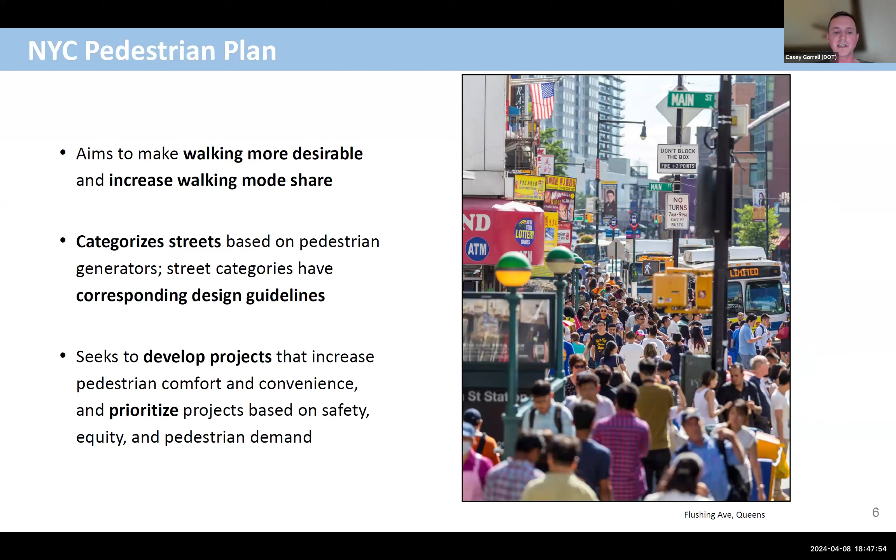One thing we want the plan to do is categorize streets based off of pedestrian generators and create corresponding design guidelines based off of those street categories. We also look to develop projects that increase pedestrian comfort and convenience coming out of the pedestrian mobility plan, and prioritize projects based off of safety, equity, and pedestrian demand.

So, mode share and barriers to walking. One interesting thing about New York City is that we're a city of walkers throughout the entire city, maybe to varying degrees. The map on the right shows the percent of commuters who walk or take transit as their primary mode for travel into work, and you can see it's really concentrated in the central part of the city, in Manhattan and parts of Brooklyn and Queens.

However, you can also see that there are parts of the city in the outer boroughs that also have a very high amount of walking. That's shown on the left with the difference between outer Queens and middle Queens, where walking is still a fairly substantial mode for people on their daily trips throughout the city.

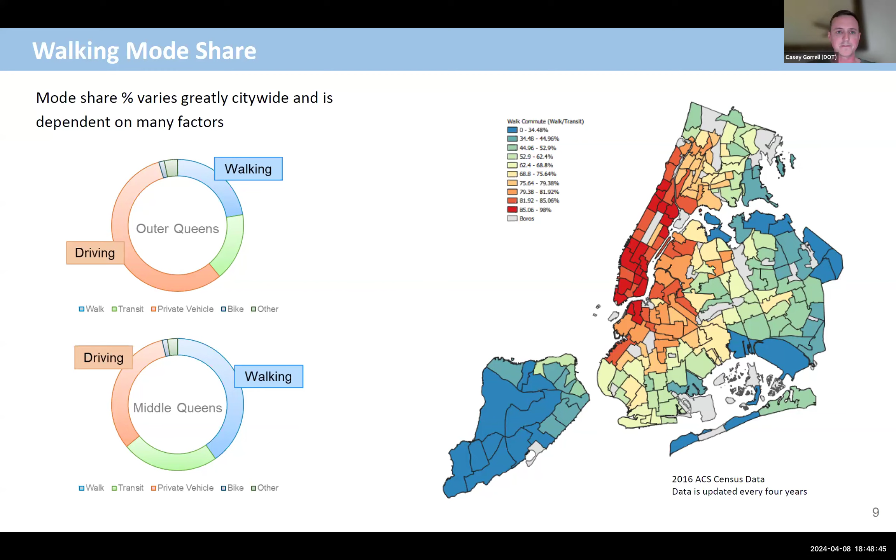However, with all this walking, there's also a lot of barriers that prevent people from walking. We've started to identify some of these issues as part of the pedestrian mobility plan. The key ones to note are missing sidewalks, or sidewalks that are there but insufficient in width. There are also sidewalks covered in barriers that prevent walking within the sidewalk that exists. And then we're also looking at a lack of crossings, especially on multi-lane streets—pedestrians need to walk on a sidewalk and then be able to cross the street to get where they're going.

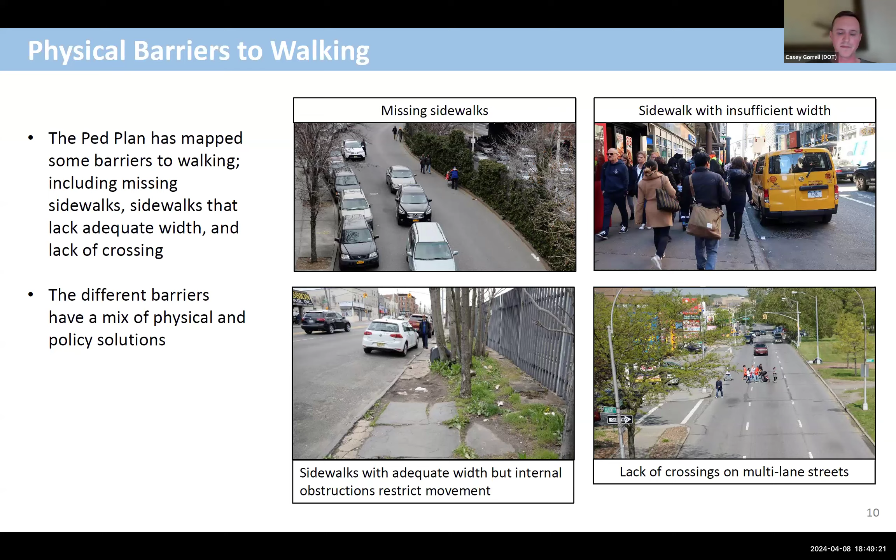As part of this mobility plan, we've created the pedestrian demand map to guide our thinking on this process. The reason for creating this is to prioritize pedestrians, who have up until now been fairly left out in design requirements and also left out of a lot of planning analysis, more specifically at a countrywide federal level.

The difficulty with pedestrians is that they don't function like a lot of other modes, where the focus is really getting from A to B. Pedestrians sometimes just go on walks without a general destination, maybe using walking as a mode of recreation, or changing modes throughout their trip depending on their needs—like someone walking to a bus stop, taking the bus, and then walking for the remainder of their trip.

One thing we've also noticed is that sidewalks really lack some of the more stringent design and level of service requirements that other modes enjoy. There's a lot of modeling guidance and requirements for vehicles, even for bikes and buses, with widths required for different types of lanes. But sidewalks really only have ADA guiding the minimum width for sidewalks to maintain accessibility, which isn't really appropriate for a city of our scale. We believe that the pedestrian demand map and the categorization based on demand can help develop targeted design guidelines for all of our sidewalks.

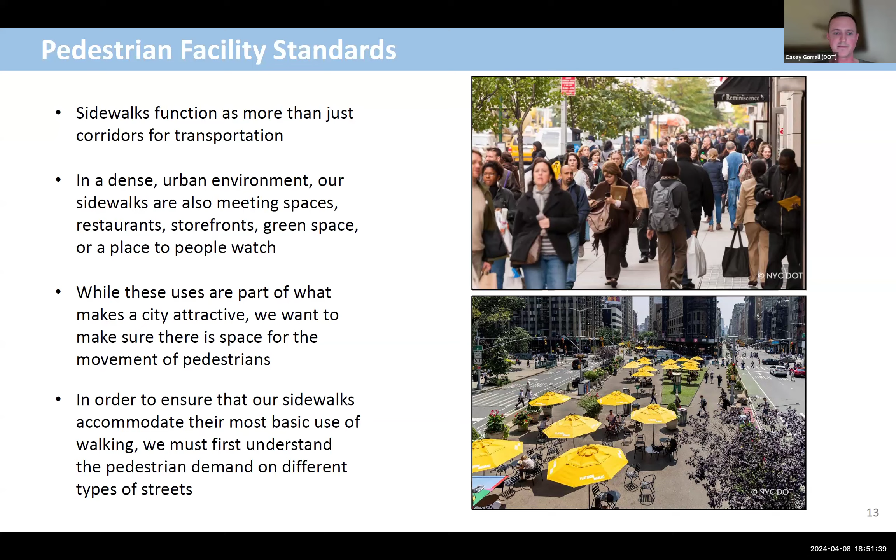So we have created the pedestrian demand map, which creates 5 categories of street. Starting on the top left, this is the baseline street. This is the most basic type of sidewalk in the city, typically reserved for residential neighborhoods, where you would really only encounter maybe 1 or 2 pedestrians walking on the sidewalk at a given time.

The next level up, we have the community connector. These are streets where we see groups of people maybe connecting to a retail corridor or walking to access a transit stop. So you usually see people in small groups walking, or someone alone with their partner.

We then move up to neighborhood corridor. These are the more standard neighborhood retail streets where you see predominantly groups of people walking to access neighborhood businesses and restaurants, and see a larger uptick of pedestrian activity.

The last 2 corridors are regional and global corridors. These are the really high tier, high pedestrian volume streets in the city, with regional being large corridors in the boroughs, and global corridors being reserved for those really busy Manhattan avenues where you see crushing crowds of pedestrians on a typical normal day. So those are the 5 categories that make up the demand map.

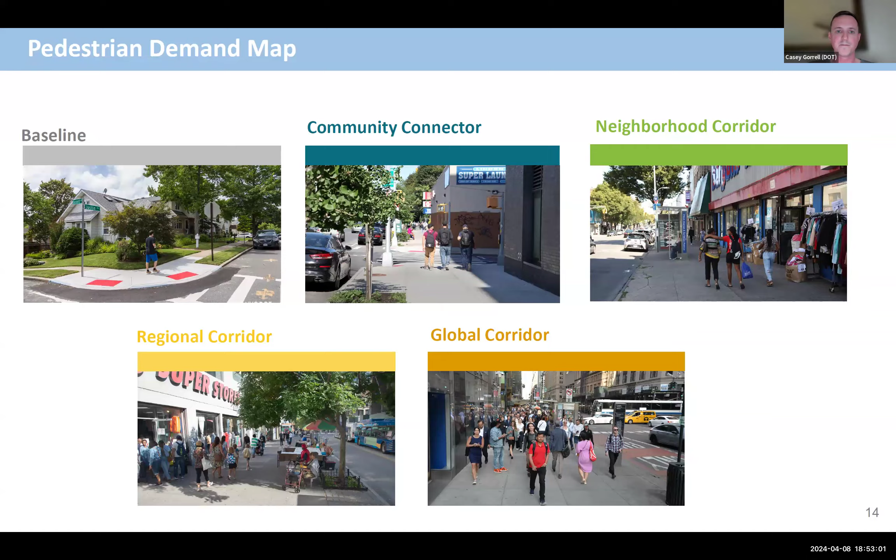It's really this remaining 15% of citywide corridors that make up neighborhood, regional, and global that we really want to focus a lot of our design guidelines on, because that's where we see higher amounts of pedestrians and higher pedestrian demand. So this citywide map is what then guides and informs a set of design guidelines throughout the city.

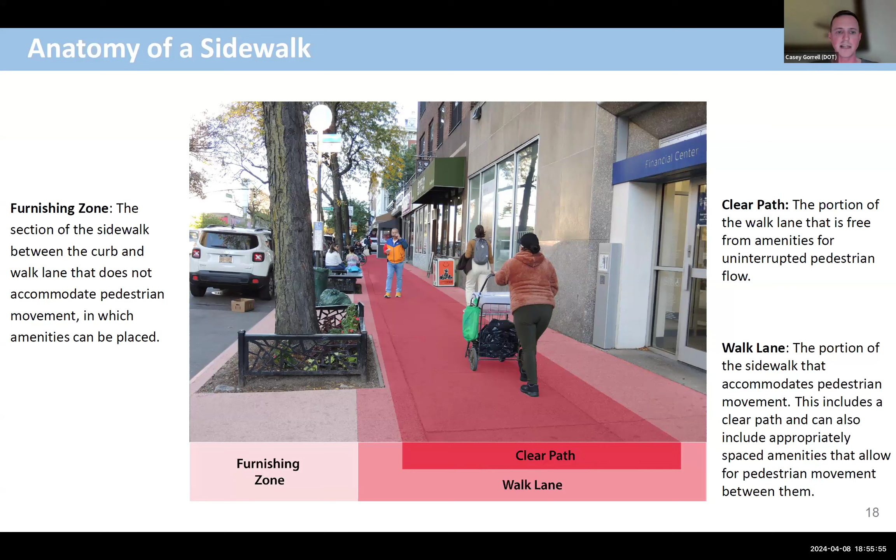We then created a set of recommended widths for each of these sidewalk categories. We're using these as a starting point to have conversations as we go through either design or policy development, to really set the expectation of what we'd like to see on each of these corridors.

That's really to accommodate people passing in either direction. That's where we see higher pedestrian volumes and demand, where people may need to navigate crossing and passing someone else. Neighborhood corridor is a 12-foot wide walk lane where you could accommodate groups of people passing in either direction.

Regional corridor is 15, and global corridors get up into very high and wide widths, with a 20-foot wide sidewalk or walk lane on either side to really accommodate those crowds of people. Think 42nd Street or 8th Avenue, where you have mass numbers of people walking in either direction at a given time.

The next design guideline is identifying the amenity zone. This is within the furnishing zone along the curb line. We really see amenities as enhancing the streetscape and enlivening the public realm, but they can sometimes disrupt pedestrian movement if they create walls or are very long and create barriers.

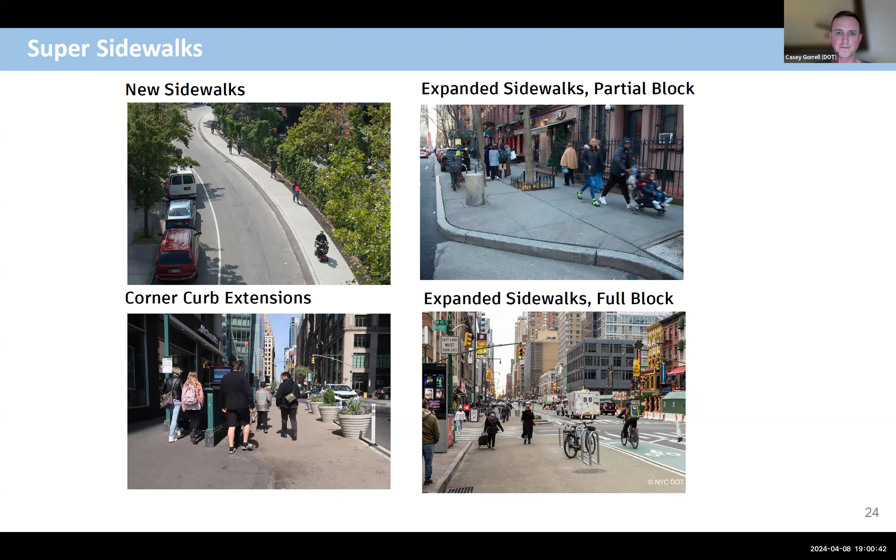We also want to think about once you get to an intersection, are you comfortable making your connection across the intersection? So we utilize treatments such as mid-block curb extensions to shorten crossings and provide more queuing space to keep people from blocking each other.

We have pedestrian islands that provide queuing space in the middle of the street, shorten crossings, and calm turns across crosswalks. A big focus for DOT, specifically the public realm unit, has been simplifying intersections. Shown here is a large curb extension that pulls one street away from another intersection to simplify operations and provide more pedestrian space.

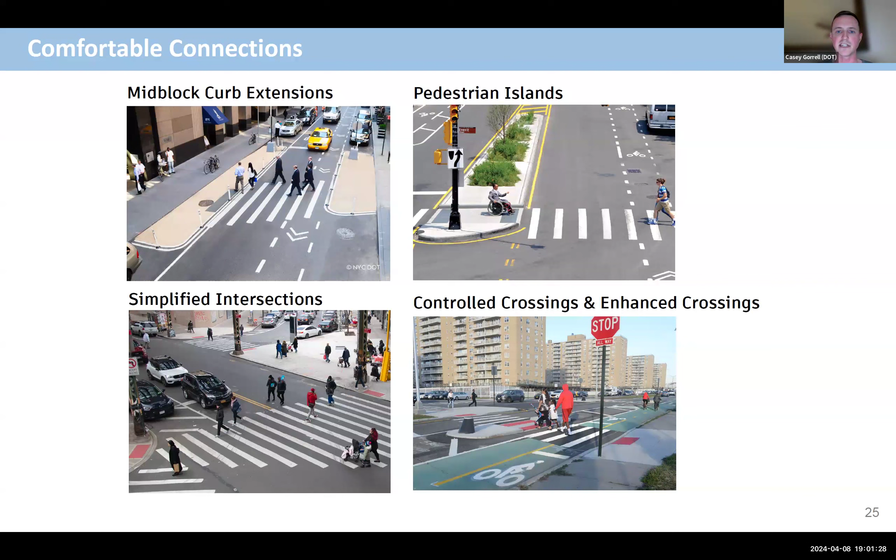And then we also have our controlled crossings and enhanced crossings, which provide crosswalks at intersections to connect people from sidewalk to sidewalk.

The final category is streets for people. This is a relatively new and growing program at DOT, looking at open streets and school streets to increase pedestrian space, either at all times or when really needed, such as school streets where you can close a street for dismissal and arrival to allow people access instead of crowding onto narrow sidewalks.

We also have a toolkit called Shared Streets, where we create flexible space in the roadway that can be used by all roadway users to decrease crowding on sidewalks and increase public space while still maintaining some regular vehicular access.

And then the upper tier is full pedestrianization through a plaza, where we create fully pedestrian space, which can help shorten intersection crossings, widen sidewalks to reduce crowding, and provide very flexible open public space.

Here's an example of comfort and convenience, showing a before-after of that intersection I noted previously, where we expanded sidewalk space to shorten crossings but also provide extra flexibility for pedestrians transiting along the sidewalks, because the sidewalks were fairly crowded in the before condition.

So what does this mean? What's happening with the pedestrian mobility plan, and what changes do we see in the future? From a high level, we see this as a living document, structured in a way to capture the evolution of New York City and accommodate changes ahead.

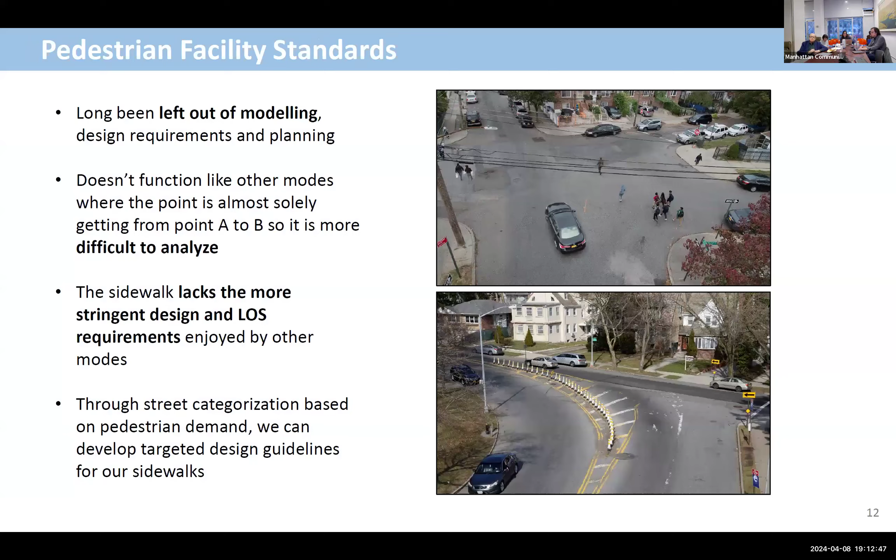Casey, I thought it was really interesting how a majority of the city was, you said, baseline and community connector streets, whereas here in our district, being 14th Street, 4th Avenue, Bowery, and Hudson River Park or West Side Highway, we have a higher mix of the regional corridor, the global corridor, and the neighborhood corridor. And I think in places that are unexpected, people would assume a certain street is perhaps a lower designation. So we're trying to understand, this is not regulatory, right? The pedestrian mobility plan is not a regulatory document, and there's going to be some sort of 2024 report, a more dense PDF of the material.

Is that correct? It's something we're thinking about. We're still figuring out the exact release of the plan, but that's kind of still in the works for this year.

So my question is, when people see the different counts of the clear path in this document, and let's say they look at the outdoor dining regulations and see that there's a difference, which one supersedes, or how should people interpret that? And just thinking of the larger picture of the clear path being presented across other agencies as well, such as SAPO and anything dealing with street activities. The last part of that question is, how is this syndicated across the city to other agencies?

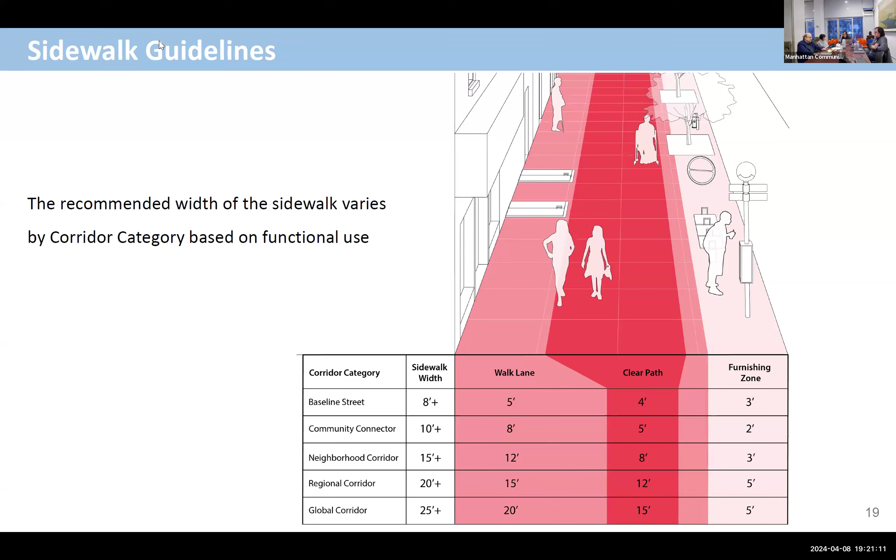The other question I had, if you could go to that slide with the methodology, which outlines what went into that, because I think there's a lot of questions, and there's a question in the Q&A. Some people are trying to make sense of the different categories by saying, well, if this street is this many feet, then why is, for example, I don't think a lot of people would think of Bedford Street as being a neighborhood corridor.

Kind of what the width of the sidewalk is, sometimes it doesn't fit with the corridor classification, but is that because of these other items, like within the neighborhood corridor, different retail per square foot? People are trying to make sense of this plan by the width of the street, and when the width falls within a certain number, but the street is classified as something else, is it because of these other factors? People are trying to understand the methodology, because thinking of common sense, certain streets seem like they'd be smaller, feeling more like neighborhood or community connector corridors, but they're really regional.

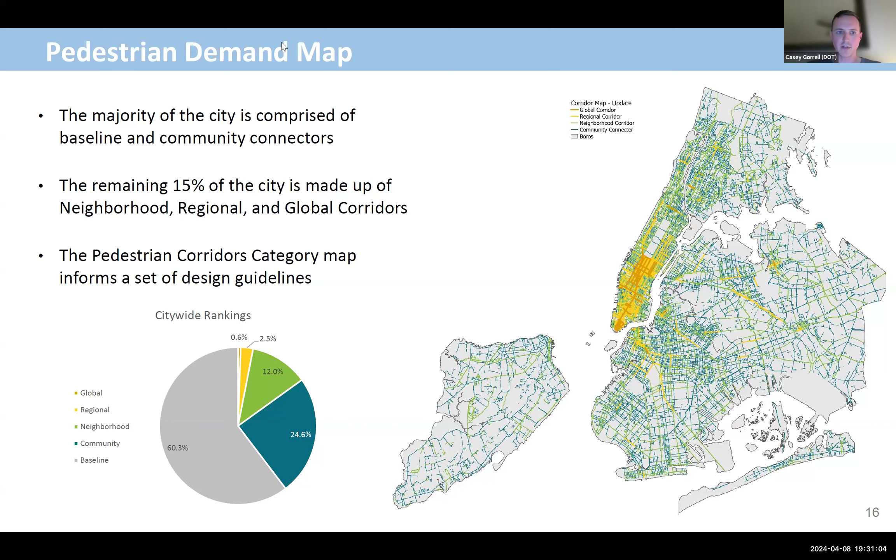And how does it handle housing units or housing type, or anything in that model in terms of thinking about resident density? So we do take residential density into account. A lot of these indicators are more business or non-residential use.

At a very high level, a lot of higher density residential is relatively close in proximity to higher density office or any high density use—density clusters around each other. We do have residential as an indicator to differentiate between baseline and community connector, on the lower end of the spectrum. If we incorporated higher density for residential, we found it actually double represents some of the other indicators we were already using, so we didn't include it as its own indicator because it was showing things already reflected in the model.

Stella had her hand raised for a while and hasn't asked anything yet. Stella, did you have something you wanted to add?

Yeah, I had a question that in a way I ended up answering on my own, but I'll ask anyway because I think it could be interesting—thanks for presenting, by the way. My question was if you know if there's a map DOT has produced that reflects current, existing conditions that this mobility plan map doesn't reflect, in terms of sidewalk widths. I found one not produced by the city, but it looks like a project someone made during COVID to see if social distancing was possible on different streets, which is interesting. Has DOT considered making a map like this, if it doesn't exist, to overlay the ideals and guidelines with the current conditions?

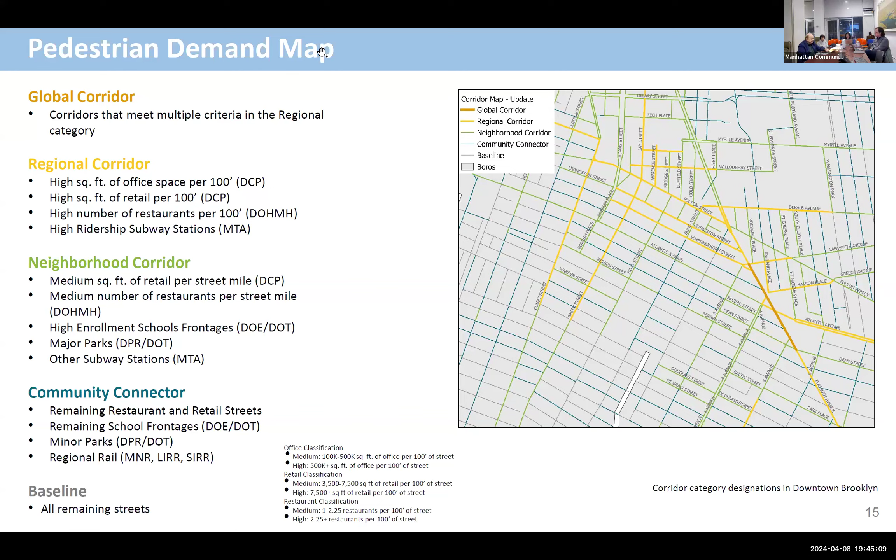Okay, let me go to the design guidelines. There's not really a guidance from this plan that identifies anything for passenger pickup. It would more be from the individual guidelines for what's in that furnishing zone that provides space for passenger pickup.

This plan doesn't really focus too much on the relationship between the sidewalk and the adjacent curb lane. It's more just focused on the sidewalk itself. So no, I don't think we have really guidance on pickup drop-off areas on the sidewalk.

See, Susan Winberg has her hand up. Thank you. I just wanted to comment on when you said you were taking into consideration that different districts have different street width issues. One thing with ours, and I heard you say you didn't walk every street, clearly we can't expect you to do that, but we are so unique and so not the formula that fits anywhere else I can think of in the rest of the city.

And when you were even saying earlier, there are no streets that are -- you were talking about 8-foot streets that didn't fit the global description. We have everything that no place else has.

And I'm always concerned, especially with open restaurants and outdoor dining, now with dealing with the streets, that we're going to come up with a solution for the city that just isn't going to work for us. We've been through so many situations like this where we point this out and the community points it out, and then in the end, the plan that works for most of the rest of the city is imposed on us as well.

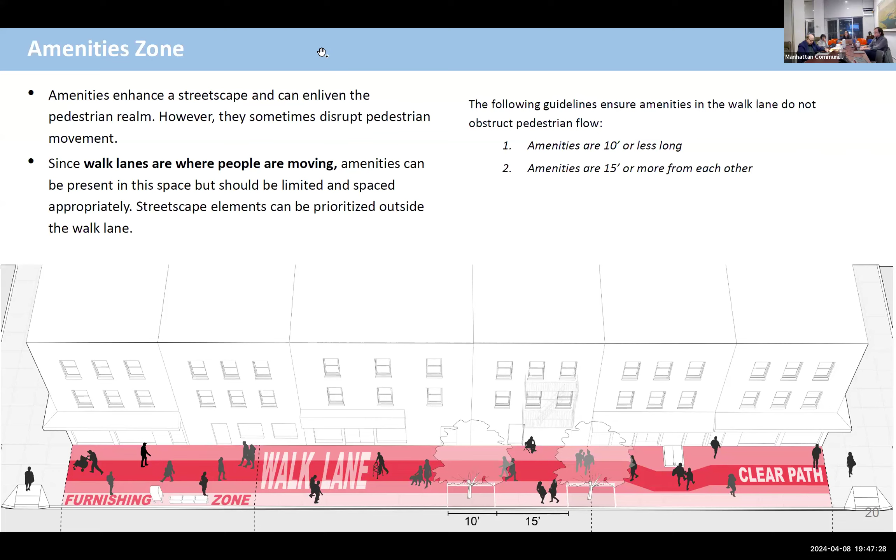Thank you, Susan. Casey, I don't know if you have any comment to that. Could you put up that slide with the email information you had, so people can see that as well? I don't know if you wanted to comment on what Susan Winberg had to say, but I was going to ask one last question.

I can briefly say this plan really focuses on pedestrian mobility at a citywide scale. It might not take into account very unique circumstances within a neighborhood, a street, or even a block. There are always things that come up with unique circumstances. So this is, as stated, a starting point for conversation. We used it to help guide policy, but it's not the definitive end of the story. This is kind of the criteria.

One other question someone had was about areas like in our district on 7th Avenue, where we have a very large sidewalk, a lot of which is taken over by subway grates. How does that work? I know this is at a citywide scale, but how is something like that taken into consideration, especially where the subway grate is, and there's outdoor dining rules related to that? Thinking of the use and clear path requirements there, as well as understanding there might be sidewalk dining there too, how does that clear path become very different, not being taken into consideration?

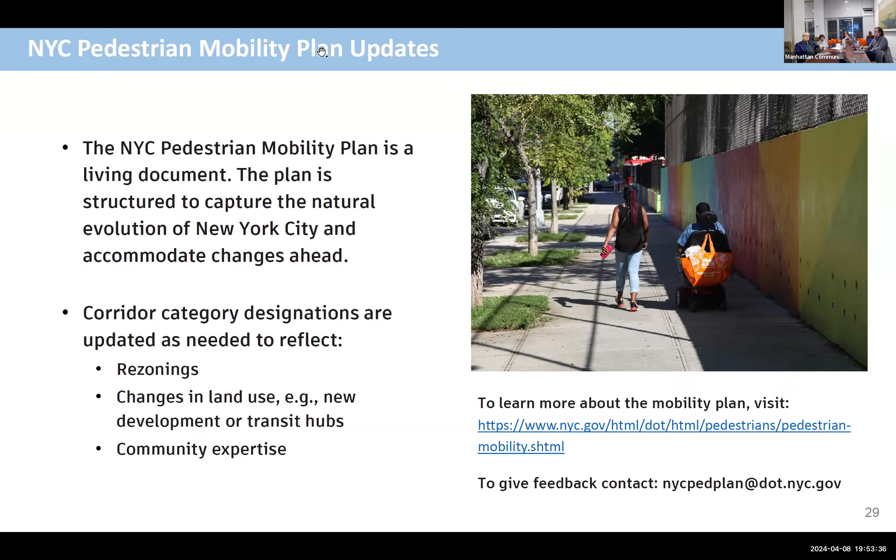Is there a way for us to get a copy of this presentation? I know the website has the different graphics, but is this presentation readily available for distribution? That's something we actually need to talk about, because our current structure for posting presentations typically goes to our current projects page, but this isn't a project. So I think we need to figure out how to share this and in what form. I think we can get back to you on that.